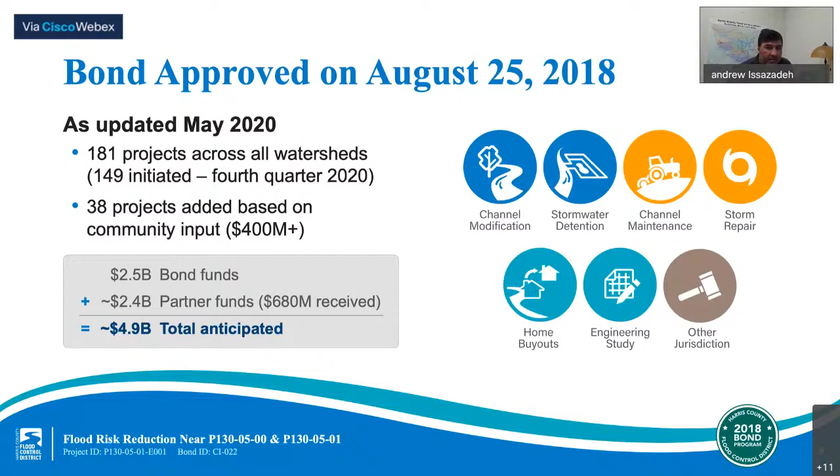Andrew, can you take that question, please? Sure, that's an excellent question. The short answer is no, because the Flood Control District is a no adverse impact agency. Project engineers must ensure that improvements made on one part of the channel in this area will not increase flooding on another part of the channel.

All right, thank you so much for that. And I'll take this next question: is there a place to find a copy of the presentation or a recording of this meeting? Information from this meeting and a recording of the live stream will be available on the Flood Control District's website and YouTube channel. So if you're looking for it, it will be available there for you.

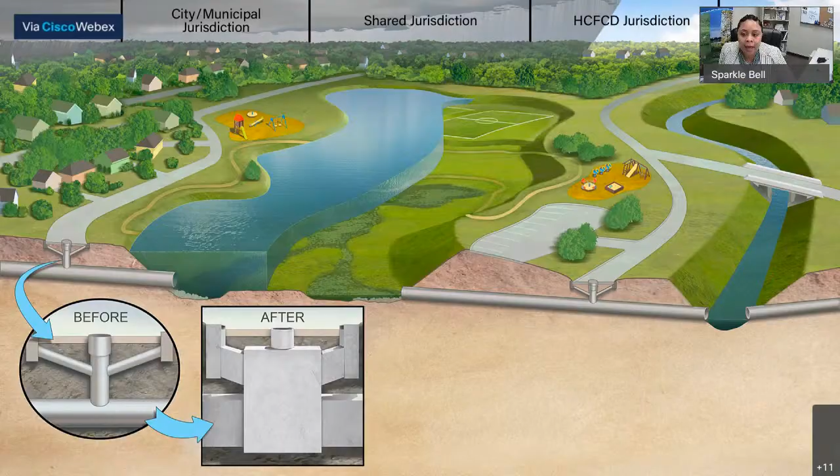We also want to remind you that if you have a question you want to ask following the event, you can visit the website at hcfcd.org/CI-022. Again, that website, it's on your screen, is hcfcd.org/CI-022. All right, I'll dive back into the questions.

Our next question is for you, Tojuana: will there be any amenities planned around this project? Good question. The Flood Control District welcomes partnerships with other entities to construct recreational amenities. We support multi-use of our facilities for such areas, but we do not fund them. So if there's a financial partner that wants to build recreational amenities, we will be happy to discuss that with them. Also, those amenities must not interfere with the primary objective of our project, which is flood risk reduction.

All right, thank you so much. I just saw a question come in from Hugo: if there are residents that do not have access to the internet, how are they being communicated about these meetings and how can they participate to provide input? That's a twofold question. The first part is that we actually mail out meeting invites and information about this meeting in addition to what we post and email out to our residents, to provide them the most notice.

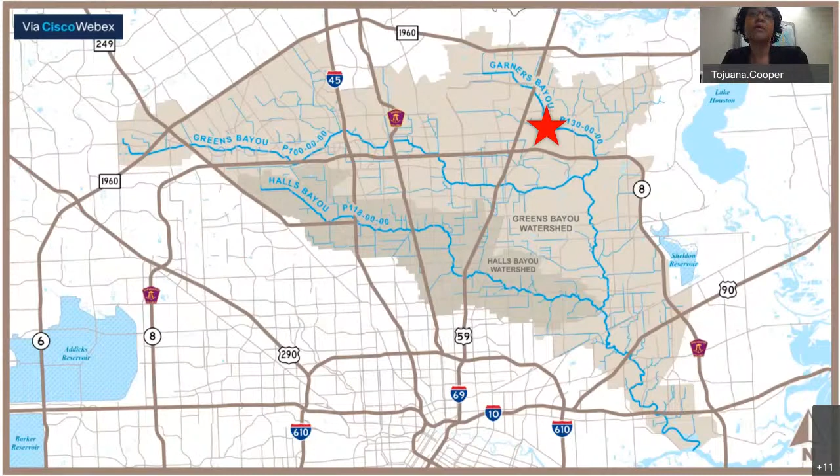Tonight, the project we're focusing on is in the Greens Bayou watershed, located in the area outlined in red, west of Old Humble Road and north of Bender Road. The main project area is located on Flood Control District's channels P130-05-00 and P130-05-01. P130-05-01 is the channel in the middle of the red area, and it's a small channel that outfalls to the much larger Reinhardt Bayou, also referred to as P130-05-00. This P130-05-01 channel is a source of flooding for the surrounding area.

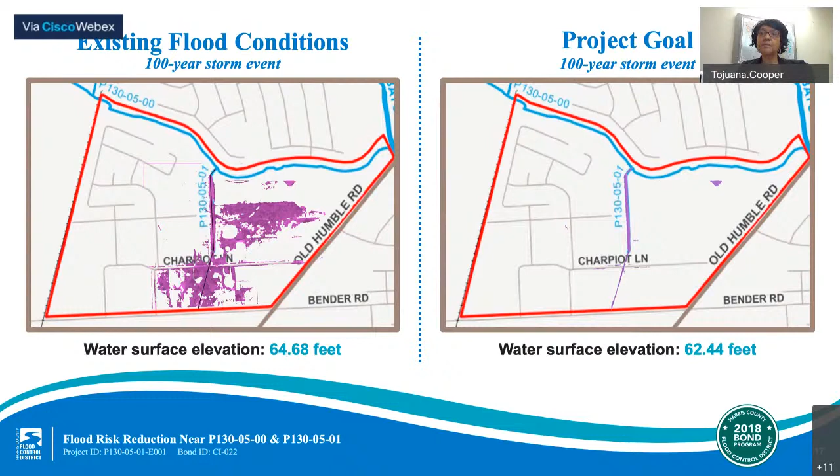All right, I see a question here about what exactly the channel improvements entail. Tojuana, would you take that one as well? Earlier I spoke about some of the challenges of the project. One of the challenges is that there are some areas of the channel where there is excess foliage, the greenery and all that, the plants, which do constrict flow. And then there are other areas of the channel that are narrow. Those particular challenges will be looked at during the feasibility stage, and our consultant will come back with some recommendations on how to reduce flood risk with respect to those challenges that need to be overcome.

All right, thank you. One of the things I'd like to get information on, we've mentioned where this project is in the project life cycle. A lot of people don't understand the project life cycle. Can you share broadly how the project life cycle works? And Tojuana, you'll have to unmute. There you go. Yes, I'll be happy to do that.

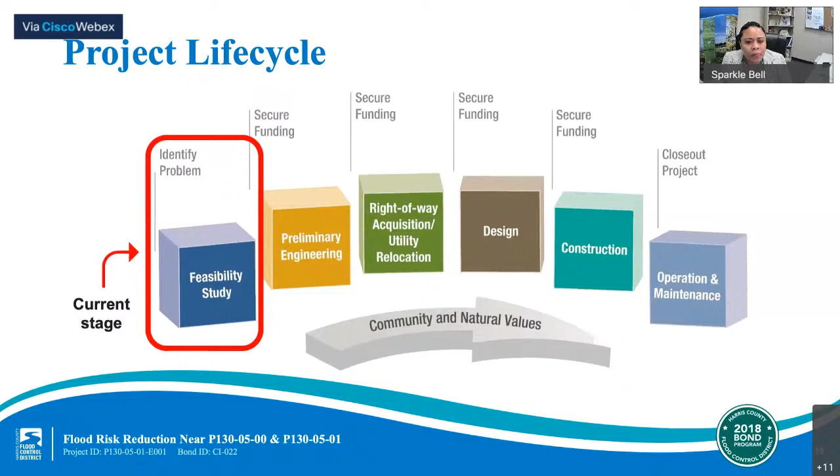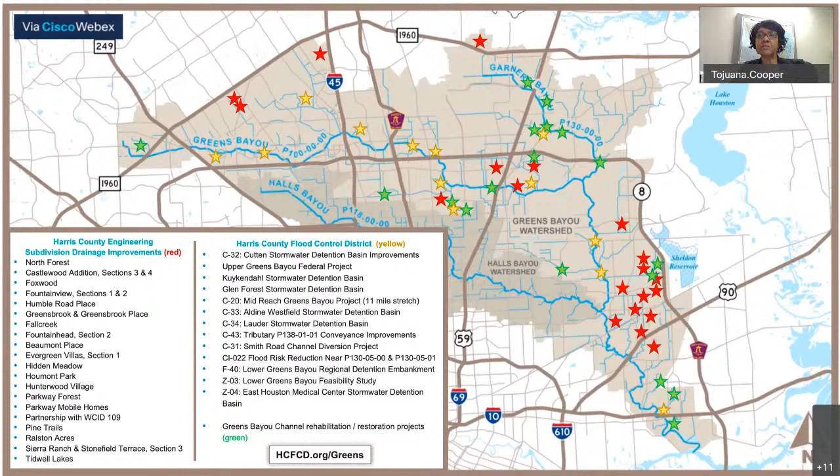What's the last part of that question? Do we join projects with existing projects? Is there ever a time when we might combine projects located near each other? Well, the flood control district has a capital improvement department and a maintenance engineering department, and we coordinate amongst our departments to determine the best way to procure or implement a project. We also coordinate with Harris County Engineering on our projects, so there's a lot of coordination to make sure we're making the best use of our resources in order to implement a project.

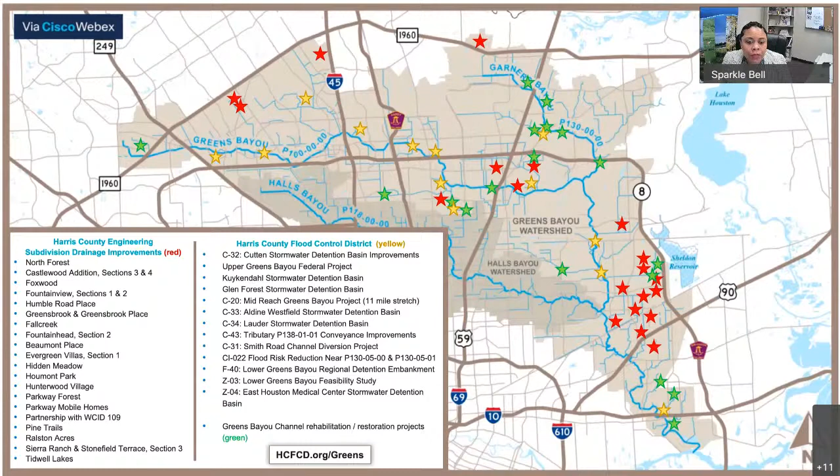They are only focusing on the flood mitigation for this feasibility study.

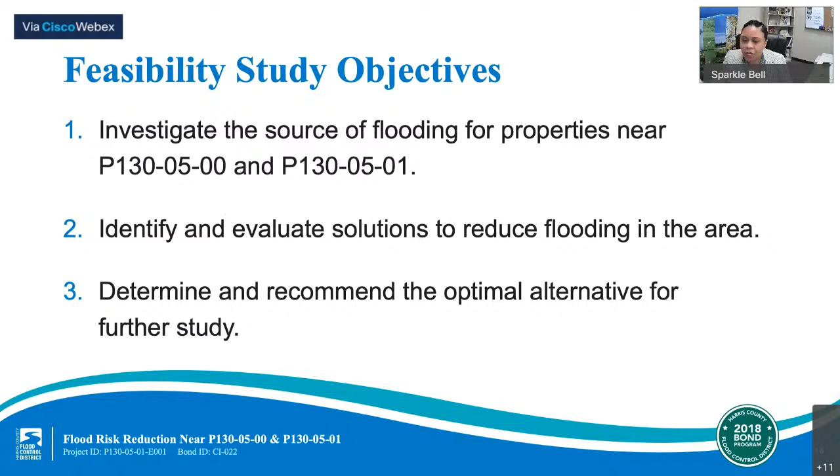Sure, I'd be happy to. Whenever there's a pipeline, we have what we call the utility engineering group that looks at the depth of the pipeline, determines who the owner is, and we communicate and coordinate with that pipeline owner concerning what our project is hoping to do, whether their pipeline is even active, and what needs to happen in order to build our project while maintaining the integrity of their pipeline. Or if the pipeline needs to be relocated, we coordinate with them concerning what's required to relocate it so we can build our project. As I mentioned earlier, we are no adverse impact, so our project will not adversely impact a pipeline, and we try to start that communication and coordination with them early so we can find out what needs to happen with respect to that pipeline in order to build our project.

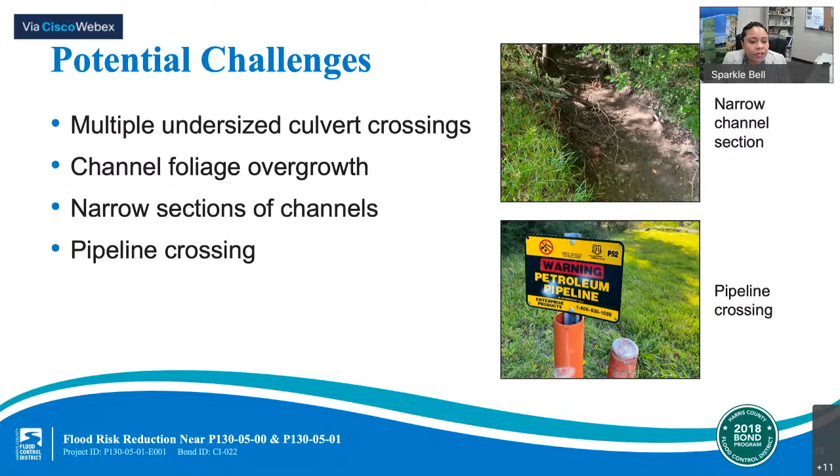Sure, we're open to partnerships with anybody who wants to talk with us about it. If they have funding for something they want to build along our channels or adjacent to our basins, we'll be happy to discuss that with them. So it could be a utility district—it just depends on what the resources are. We are open to discussing multi-use of our facilities for recreational amenities, as long as we don't fund them. We cannot fund them. So if there's anybody out there who's interested, we'd love to hear from you.